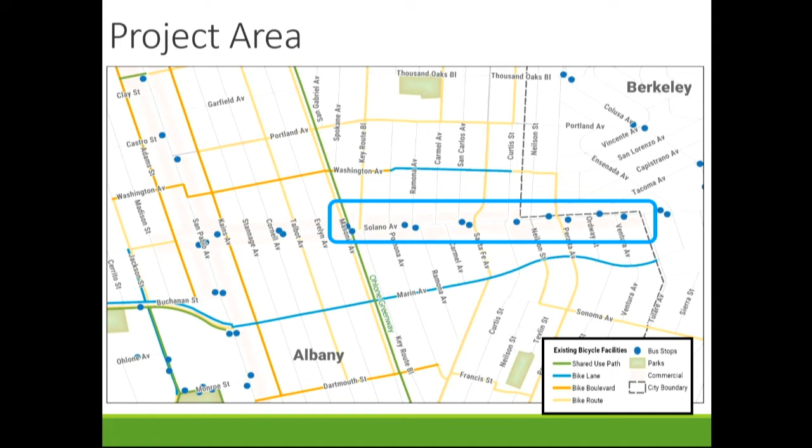So what will our plan include? Our plan's really looking to develop vision and goals for Upper Solano Avenue. We're also going to look at what it is like today. What's it like to walk, bike, drive, take transit along the corridor today?

And then we're going to take all of the comments that we've received throughout the community outreach process, through the meetings that we've had with our community advisory group, which is comprised of business owners, representatives from the Solano Merchants Association, from the Albany Rollers and Strollers, as well as nearby community residents. And so we've been meeting with them as well as the Traffic and Safety Commission.

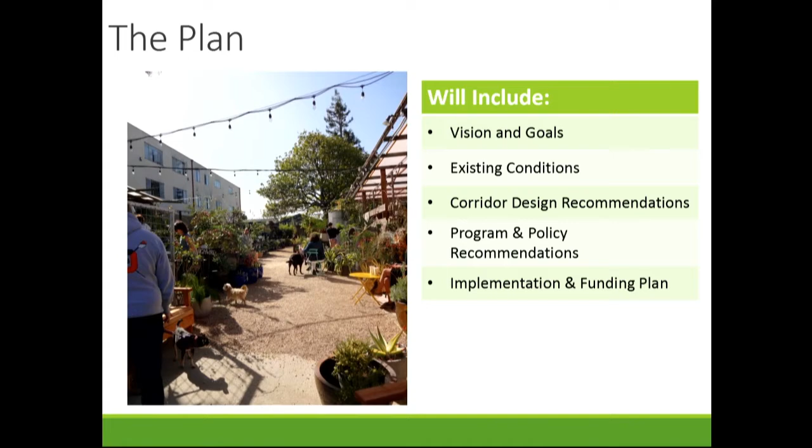So we're going to pull together all of this great thinking that the community's done, that the city's done, into the draft design that we're going to actually show you tonight. The plan will also include some policy and program recommendations as well as how to get it done, so an implementation and funding plan.

So next slide. We want to ensure that the plan that we're developing really aligns with the community's goals. Throughout the outreach process, we've heard these 4 main interests really rise to the top. People are very interested in improving safety for all people who use Solano Avenue, in enhancing the access to transit, as well as providing a cohesive streetscape.

People say they really enjoy being on Solano. They love to shop, they love to eat, they love to run their errands, but it could be more inviting, it could be more enhanced. You could have more of a sense of, I'm really on Solano Avenue. So really looking to support and bring up the things that people really love about Solano, and also Lower Solano, as we talked about. And then supporting the local economic activity that's there today.

So in order to get community feedback, we held a walk audit and design workshop in late May. We had about 40 folks attend, and it was just a great couple of days. We had a charrette, and it kicked off with the community outreach portion. And then we can go to the next slide. And then we had an intensive design workshop with our urban designers from our team at Toole Design, as well as the team from Opticos, and we began to sketch out ideas. Actually, right in this room, we had a table set up right over there.

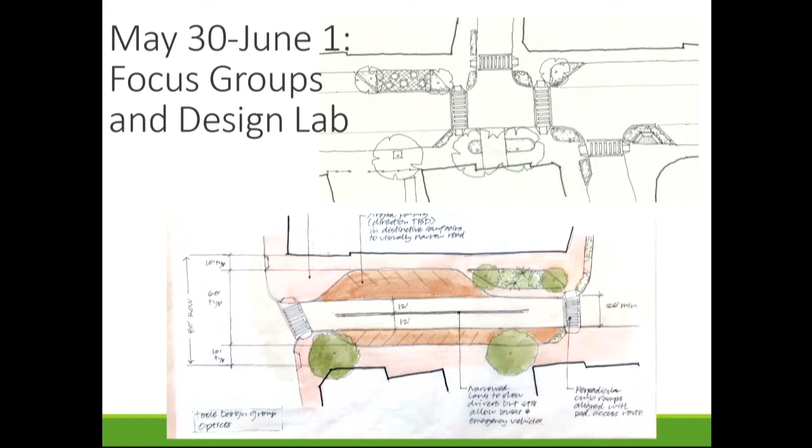So during this, we also had focus group meetings. We met with folks from the Center for the Blind, and we also met with a bunch of business owners to get a sense of day-to-day, what is it like having a business? What's parking like? What's loading and unloading and goods movement like for you? We also met with city staff, including police and fire, to really get feedback on the initial ideas that we were developing.

So then, next slide, please. What we did is we took all these ideas and we developed the corridor design that you see down here in the picture on your left. After we developed this, it went through a city review process, but then we also wanted the community's input on this as well.

So in late September, we held a design preview and pop-up event. We had the corridor design at Flowerland, which was really fun and just very inviting. And so folks were able to really look at the corridor design and ask us a lot of really great questions.

And then we also simulated what it would feel like if the design was implemented at the corner of Pomona and Solano Avenue. So I'm not sure if you were able to come by, but I hope you were. We had a temporary demonstration at that corner. So folks were able to, as you can see in the image, we used these straw wattles to simulate bulbouts, to simulate the refuge islands.

So people were able to experience what's it like to cross the street, what's it like to drive through this area. So we had, of course, people driving their personal vehicles, but we also had a tanker truck come by and a FedEx truck come by. So we were really able to see what is it like for really bigger trucks to use this area and what's it like for personal vehicles to use this area.

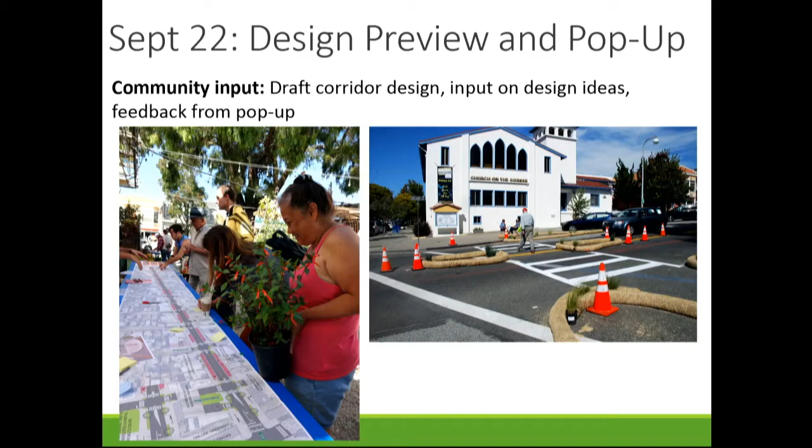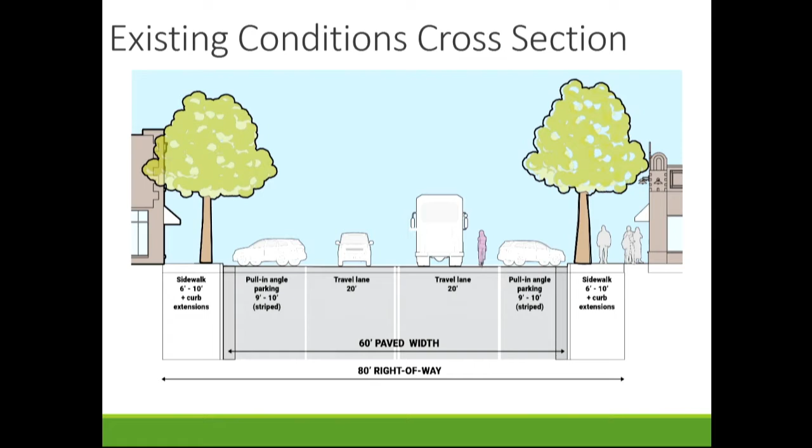So next slide, please. So to give you a sense of what it's like today, this is a cross section. So this is sort of if you took the street and sliced it in half, what it would look like. So currently the travel lanes for the vehicles are about 20 feet wide. We have pull-in angled parking that's about 10 feet wide, and the sidewalk really varies in width from 6 feet to 10 feet. So next slide, please.

So what this shows is the proposed intersection cross-section. So at the intersection, we really propose narrowing the travel lanes to 11 feet. We also recommend extending the curb, and the width sort of varies at the different intersections. And we also recommend extending the sidewalks in some places. So I want to dive in a little bit about why we're recommending this here.

Intersections are really the most stressful point for pedestrians and bicyclists because it's where most conflict happens with cars. I'm sure you've experienced this yourself as you walk around. By narrowing the travel lane to 11 feet, this still is wide enough to allow fire trucks to go through, to allow delivery trucks to go through. But it narrows the travel lane such that pedestrians have a much narrower width to cross.

And so especially by adding the pedestrian median in the middle, it really helps folks get from one side of the street to the other in a very safe way, especially because Solano only has signals at 2 intersections, and I believe there's no stop signs other than those 2 signalized intersections. This really helps also to slow down traffic by narrowing the travel lanes, and that was a key goal that we heard from the community throughout the outreach process.

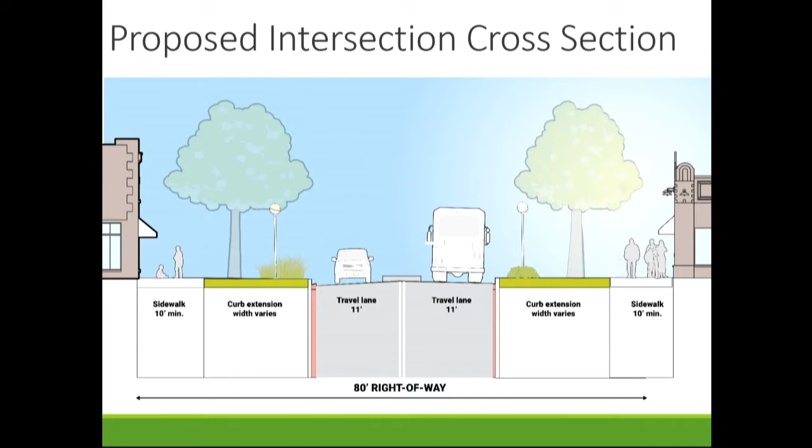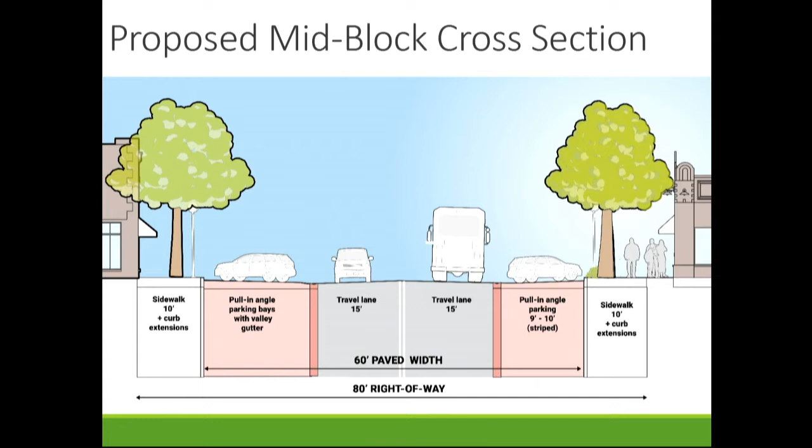So next slide. So this shows what it would look like at the mid-block. So you've now passed through the intersection and you're between the 2 intersections. It does widen out to 15 feet here. That allows for cars and space for bicyclists as well. But you don't really need as much of a pinch point in the mid-block as you do at the intersections because folks aren't often crossing the street there unless they're running across to reach Flowerland, which we've heard anecdotally a lot of people are interested in doing.

Okay, so the draft design was included in your packet, and I think tonight for the presentation, unless you have specific questions, which I'm happy to answer after the presentation, I wanted to give you an overview of what are some of the common recommendations that we have throughout the corridor. And I think I might have you go to the next slide. So what we really wanted to focus on is serving pedestrians.

So this is an example of some of the improvements that we made by, like I said, narrowing the travel lanes, adding in medians to the middle of the crosswalks, by restriping the crosswalks and making them high visibility crosswalks. Also realigning the curb ramps. So I don't know if you've experienced this, but on many of the curb ramps on Solano Avenue, users are often pushed to the intersection rather than to the crosswalk. And so we really want to realign that so folks in wheelchairs and folks pushing strollers are much more comfortable. I think we can go to the next one.

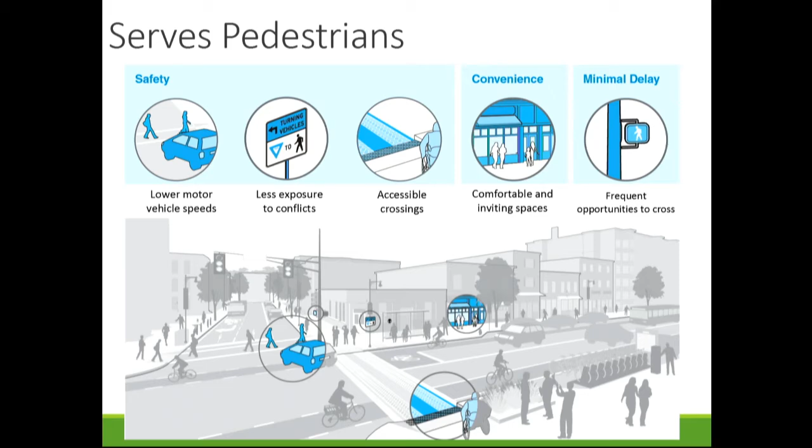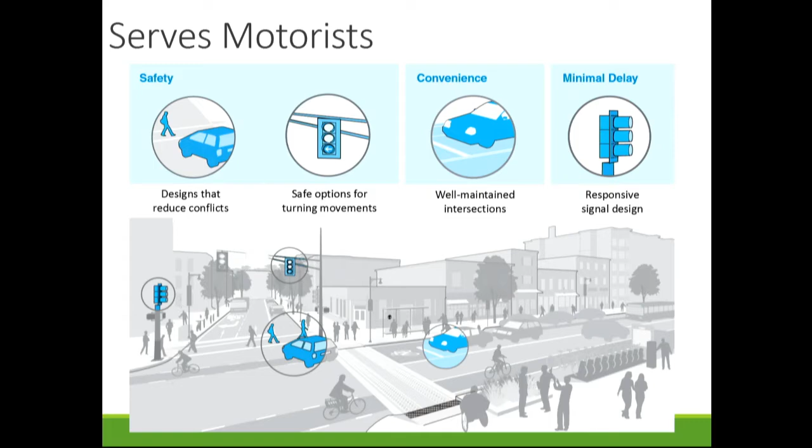We also recognize that people drive on Solano Avenue, and we really want to be mindful of reducing conflicts for motorists as well. And so by providing more space for pedestrians, by providing ways to slow down the vehicles, this will hopefully reduce conflicts and reduce confusion amongst users.

So this is just a general overview of many of the recommendations that I've been speaking to you about. We're also recommending to widen and repair cracked sidewalks. There's many areas of the sidewalk throughout the corridor where maybe larger trees have uprooted the sidewalk. So we're looking at repairing the sidewalks in those areas, installing the curb extensions, as well as considering repaving the parking area or adding a textured pavement so that it visually narrows the corridor as folks are driving along.

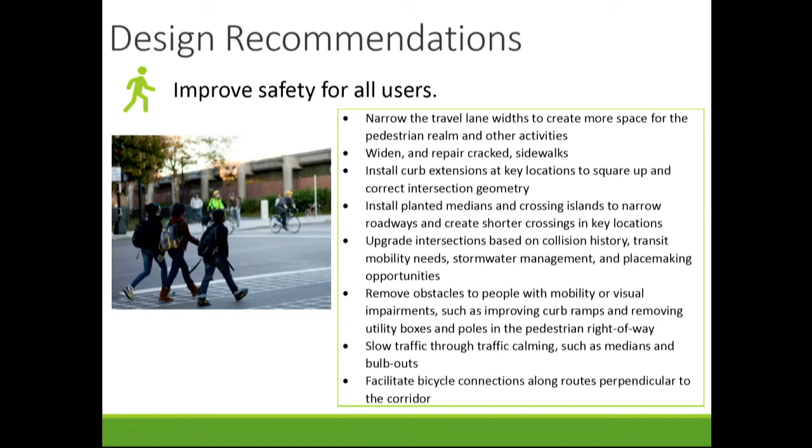Next one, please. We also want to be mindful of transit riders. So this is an AC Transit route, and this design really seeks to make transit stops more accessible and more comfortable. So in many of the areas where we're recommending curb extensions, we're also partnering this with transit stops that can also be really activated as public spaces. So think about the parklet outside of Hal's Coffee on Lower Solano. So ways to make it a public living room, but then also serving transit riders as well.

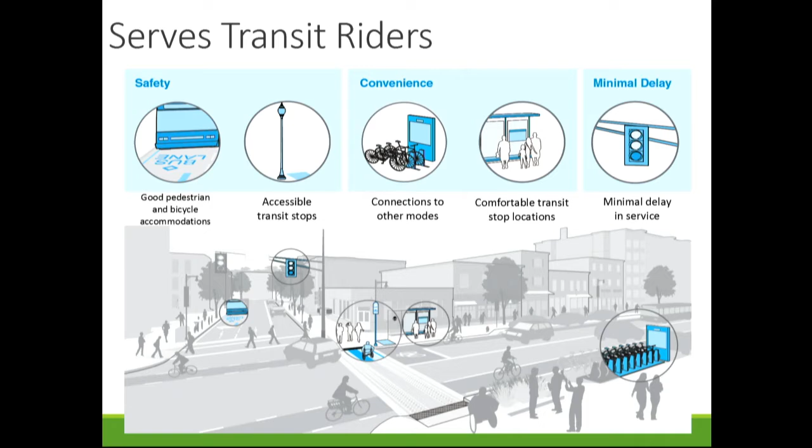We've been speaking with AC Transit, and they have done an analysis of the corridor and found that there are two stops, one at Tacoma and one at Ventura, that they consider ghost stops. And so that means that folks aren't really catching the bus there very often. They're not really getting off the bus there as often as the other stops. And so this really slows down service. And so AC Transit is interested in the possibility of removing those stops to increase the efficiency of the transit service. So this sort of does a double benefit in that it improves transit ridership, but it also has a net positive effect on parking.

So we detailed this in the memo that we provided you this evening, but with the corridor design, there's actually a net increase of 9 parking spaces. And this is largely due to these closures of the 2 transit stops. So we're going to see an increase in 6 sort of regular parking spaces, and then an increase of 3 ADA accessible parking spaces.

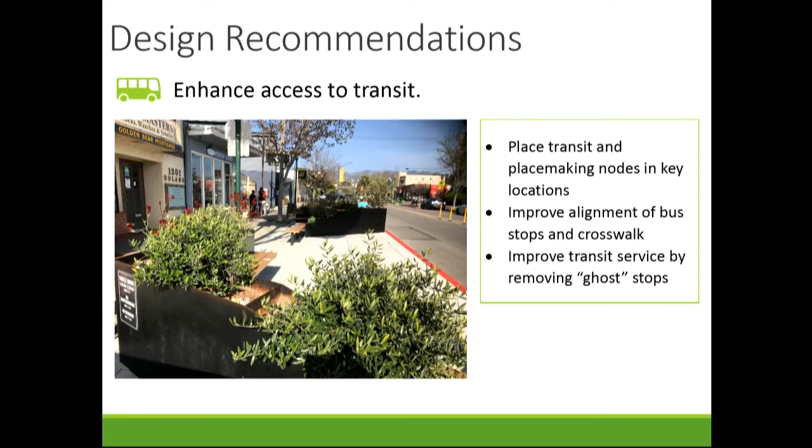Also want to add that currently the parking stalls are not all at a consistent angle. And so as a part of the design, we've restriped the parking to be at a 45-degree angle. And this allows us to pick up a couple of extra spaces that can be used for bike parking or motorcycle parking. So there's actually also a net benefit of 18 spaces that could be used for motorcycle parking, or it could also be used for on-street bike parking, such as a bike corral, that kind of thing. So we are seeing a positive increase in the number of parking spaces. Okay.

We're also looking to enhance the streetscape. I spoke a little bit about this, but looking at the lighting and the landscaping throughout the corridor, at the intersections where we're increasing the curb extensions, the bulb outs, thinking about how can we best program these. So in some areas it might be, this is really a great location for sidewalk dining, if maybe it's outside a restaurant, or maybe this is a transit stop, or maybe we want to add some nice landscaping that can also serve as stormwater management. So being very thoughtful about how to activate different spaces along the corridor.

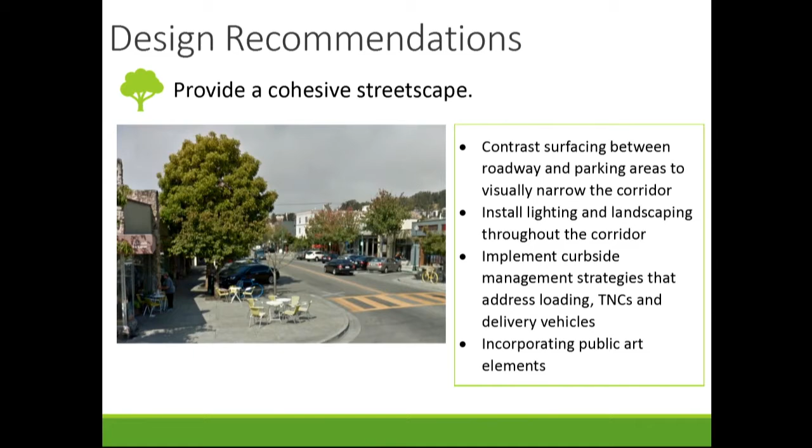We're also looking at incorporating public art elements, so considering blank walls for possible murals or green walls. Also looking at places where there could be a gateway to Upper Solano and possibly Mid Solano, and also considering curbside management strategies, so thinking about loading and unloading. We heard that a lot of people actually will park just briefly to pick up dinner, that kind of thing. So how can we have parking spaces that really serve people who are maybe using the corridor only for a limited amount of time to pick up dinner, that kind of thing.

And we also really want to look to support local businesses. So looking at the existing business ecosystem and building upon that with retail strategies, as well as creating public spaces to encourage people to linger and really spend time on Solano Avenue, say, well, how about we meet at the intersection of Solano and Santa Fe and just spend all afternoon there? So really creating gathering places throughout the corridor.

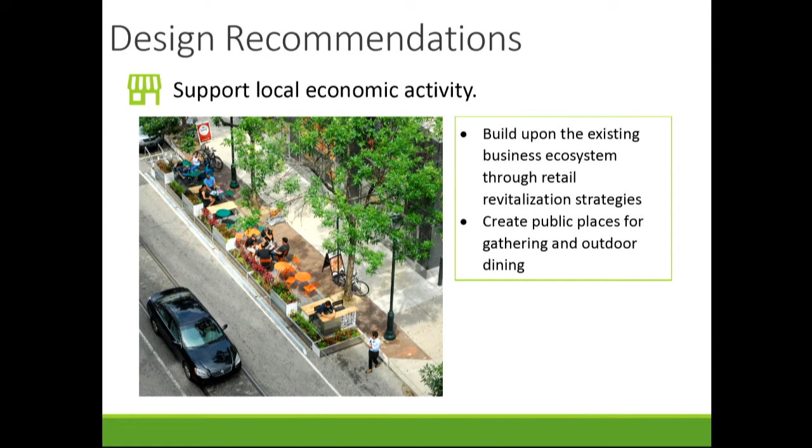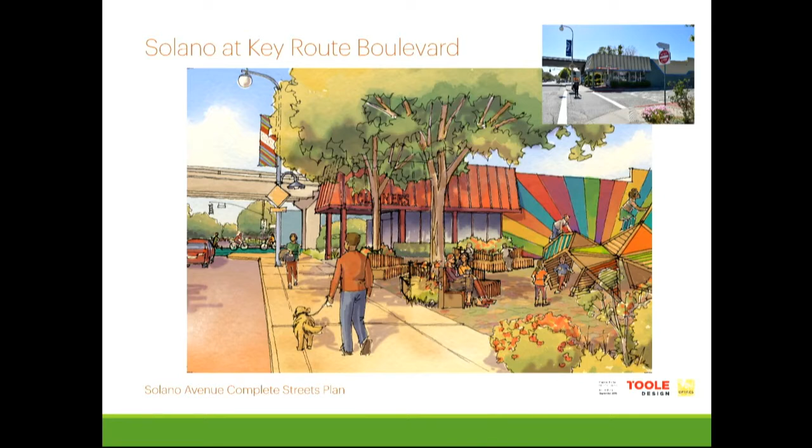So this is looking west at Key Route Boulevard. You can see the picture in the top right-hand corner of the cleaners, which you may be familiar with. This is looking at the possible alternative if southbound Key Route Boulevard was closed, and the design actually has an alternative to reroute it. But this could become a public open space, and it shows activity. This wouldn't touch the Veterans Memorial that's there now. It would keep that memorial but enhance it and build upon it as a public space. Interest in having more play areas and more public gathering space was heard throughout many of the outreach events.

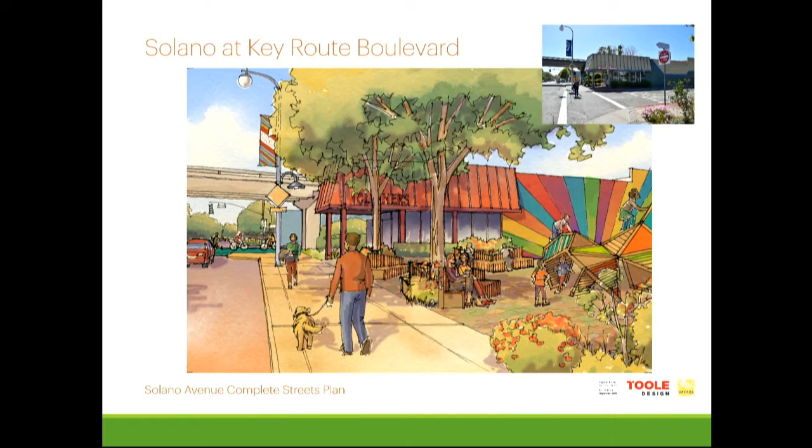Okay. And then this is our last perspective. This is Solano at Tacoma Avenue. This stretch of Tacoma Avenue is actually in the city of Berkeley. So Anne and her colleagues have been very diligent about ensuring that their colleagues in Berkeley have been involved in these conversations. They actually sit on the community advisory group that I mentioned earlier. So they have vetted these designs and said that they really appreciate the designs put forward for Tacoma Avenue.

What's proposed here: currently the crosswalk there is very long, and it's stressful for folks crossing the street. So this would be squaring up the intersection so that it shortens the crossing distance, and it also creates additional public space. This would be, if you're heading south down Tacoma Avenue, what it may feel like heading in that direction.

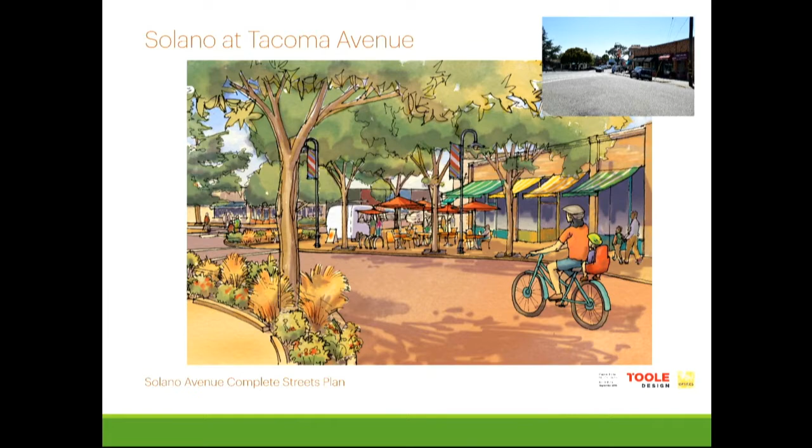So as a reminder, we will be back to you in December to January with the draft plan. This will incorporate all of the designs that I've presented tonight, as well as a write-up of our process and programmatic and policy recommendations moving forward.

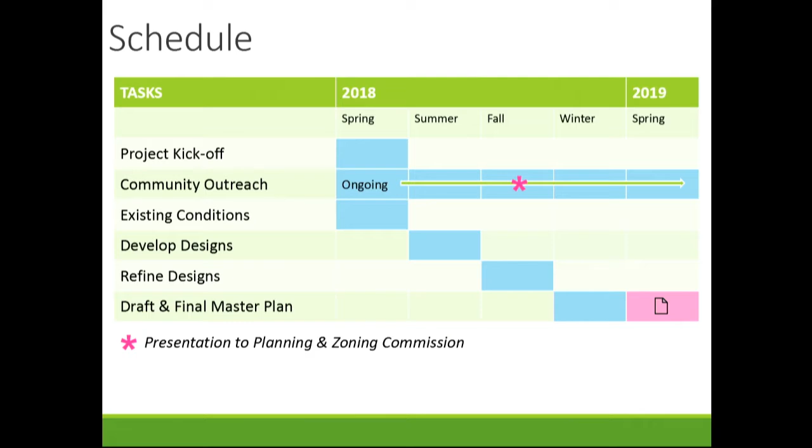Great, thank you. Commissioners, are there any questions you would like to ask at this time? I probably have a few questions. Thanks for the presentation. Sure. Thanks for what you've done on it. It looks great. It really is an exciting project, I think.

I may have a few questions, but the first one that comes to mind is maybe you can talk a little bit about the process and what happens once your report is done, because I'm interested in implementation already. So is there money for Complete Streets projects, and are you doing cost estimates? And will we be applying for grants? We're going to be looking for grants. At this point in time, it's really just the high-level plan. Once it is adopted by the city council, we would start applying for grants to do some initial design work. So we need a plan adopted by the council, okay.

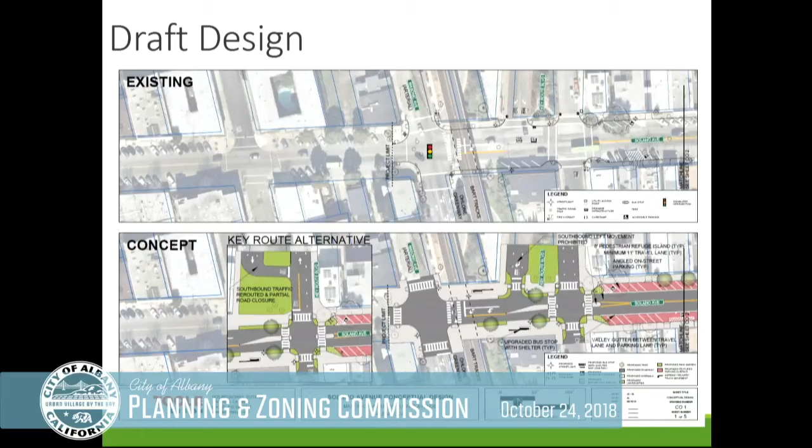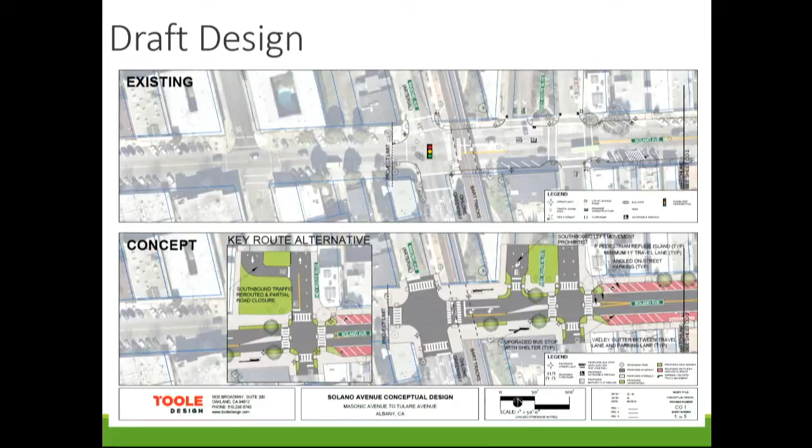The reason that they like that is that in the other design, and I would like to point. It's right next to it. The other design is right there. This doesn't allow a left turn. It doesn't allow the left-hand turn, and a lot of folks have given us feedback that they make that turn a lot if they're heading to schools and running errands.

And so people say, I understand why you want to do this. Having two intersections so close together just makes it really difficult for drivers and for pedestrians. I'm sure you experience this all the time. So we really wanted to simplify it, and people are really gravitating towards the Key Route alternative. It was pretty clear in both the outreach with the community advisory group and the September pop-up event.

People really liked the alternative because it still allowed them to turn left, but it also provided clarity. They also built upon this idea and asked whether it would be possible to extend the sidewalk north through the median, and had great suggestions for play areas in the green space. We still need to do some internal vetting to ensure city staff agree, but we're leaning towards the alternative at this point.

Well, I have a couple of comments on that. I probably favor that option too, myself. But I'm thinking about parking for the dry cleaners that's there. There's one green space in front. Most everybody parks on Key Route and walks in. It looks to me like they'd get 3 green spaces maybe, or some curb spaces on Solano. Maybe they'd gain 2. But anyway, I'm worried about access to that business. That's right, and that's a concern of ours as well.

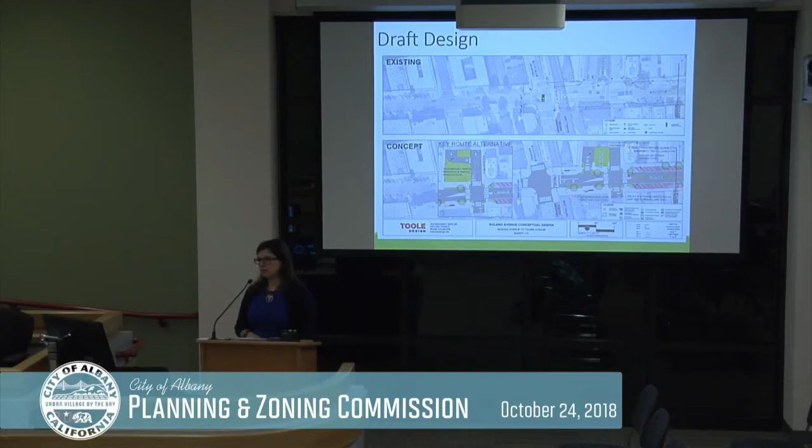Have you been in contact with Safeway? I have, yeah - with their Real Estate Division. I raise that because they run big semi-trucks up there, and they navigate the lower part of Solano right now without much trouble, I guess. But I think they should know about this. They back into their loading docks, which are poorly configured and difficult to get into. I think they use the driveway that you're going to keep open for most of their work, but sometimes they're also on Neilson there, and I don't know if they back in that way or not. So that was a thought I had, the effect on Safeway.

It looks to me like on your plan you're showing that as leave the parking lot only - would that be both an in and out access into the Safeway parking lot on that westernmost driveway? Yes. It's how it's currently configured, and that would continue moving forward.

We've also run the AutoTurn program on many of the intersections, especially around Safeway, with the recognition that larger trucks do enter Safeway. So what we're proposing there are called truck aprons, which would continue to narrow the travel lane for personal vehicles. Truck aprons are in our engineering toolbox - they're very comfortable for 18-wheelers, delivery trucks, FedEx trucks, that kind of thing to mount, but for personal vehicles it's a bit rougher. So it really encourages people to drive slower around there, but it doesn't impede emergency vehicles and delivery trucks. We've run the analysis in those areas, and the larger trucks can still make the turns even with the truck aprons that are proposed there.

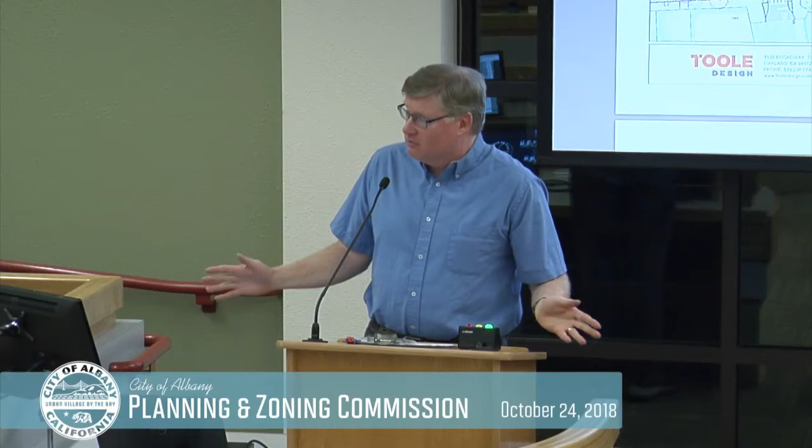As a stroller and roller, I want to say that slowing the traffic is fabulous for bikes, for cyclists who want to get on Solano. It can be pretty scary with the large trucks. We understand why they're there, and slower traffic would help.

I want to point out, though, that while intersections are hazardous, often one of the scariest things on Solano is motorists pulling quickly into parking spaces. When cyclists don't feel comfortable in the lane, they're often sharing the lane. Very often, motorists will spot a parking space and pull very quickly into it without signaling. I've been in a car where this happened, I was not driving thankfully. I could see it happening to me both as a motorist and a cyclist.

As a result of this concern, the Traffic Safety Commissioners requested that staff consider back-in angle parking. I don't want to go into that in the short time I have, but I could certainly explain it if requested. Staff is responding at our next meeting, hopefully with a demonstration, so we could take a look at what that might look like and share with the community as an option.

I think it covered just about everything I was concerned about. There definitely needs to be something done about the different types of people who need to bring their cars to Solano, whether they're getting a ride share, picking up dinner, or dropping grandma off at the restaurant and then finding a more long-term parking space. Especially after enforcement ends, it gets really scary out there in the dark in the winter, with a lot of people double parking and all.

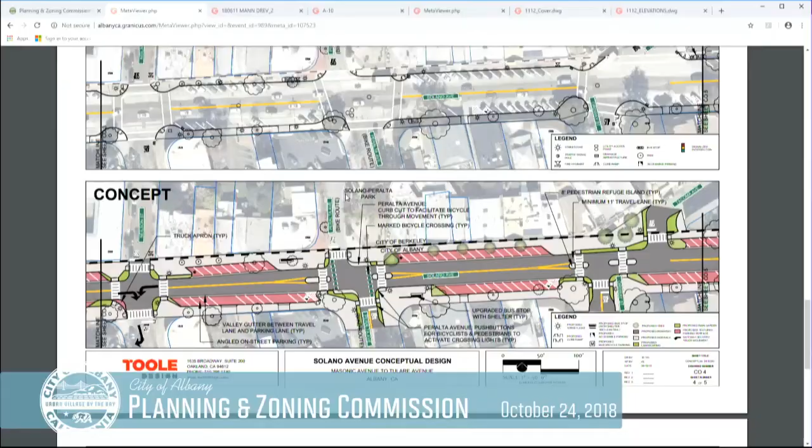We have proposed a location for a rapid flashing beacon at Peralta, which is identified as a bike route in the city's plans. You can also see there are proposed conflict markings to help facilitate bike traffic north and south. We're proposing the installation of push buttons — two separate push buttons, some accessible by pedestrians, and some accessible by bicyclists so they wouldn't have to dismount from their bikes in order to push the button.

The thought is that those are some specific bike route treatments. We've also gotten feedback throughout the community engagement process that Curtis is identified in the Berkeley bike plan as a bike route, so there's been encouragement for us to look at providing better north-south connections across Solano on Curtis as well, to align up with your neighboring sister city. By teeing up many of the intersections and providing ways to slow down traffic, we're hoping that all of those will have spillover effects to better serve bicyclists. This has been a really big topic of conversation for the city and the project team throughout, and these are some of the considerations we've been giving to bicycling users.

Yeah, okay, thank you. Yeah, you're welcome. Are there any other comments before we wrap this up? One more comment I wanted to make.

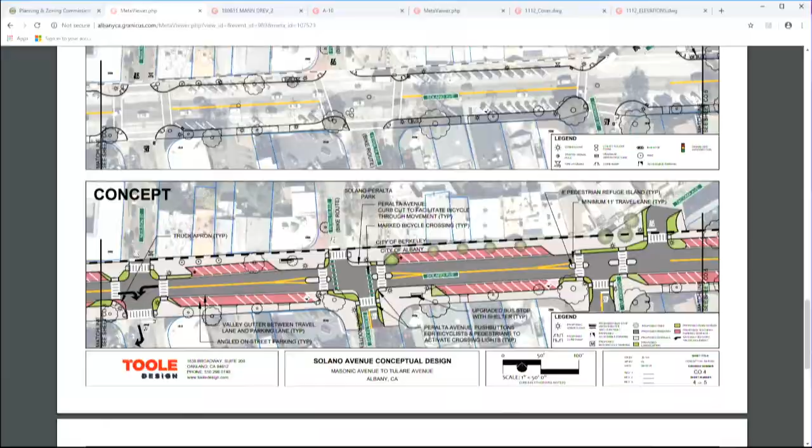The public art component is intriguing here and not to be overlooked. I'm excited about some of the drawings you proposed. I would urge extra care and extra communication down there by the Veterans Memorial at Key Route.

I stood there today trying to envision how a modern kind of recreational facility could be integrated into that space that would be freed up next to the Veterans Memorial, which is kind of historic and Art Deco sort of style, and not something that at least a lot of us old timers in Albany would want to see modified.

How to integrate that, I see that as a real challenge, because I don't know quite how to do it. That being said, I'm quite intrigued with the idea of freeing up that street space there and having some extra open space at that location. So I'll make that comment.

Your focus on Santa Fe as being a real pedestrian gathering place is lacking sort of a restaurant or an ice cream shop, or that seems to be the magnet. Ice creams or coffee seem to be the magnet for people. But with the bank there and the other uses that are there right now, the small retail, I think you have to work with some businesses to really make that happen.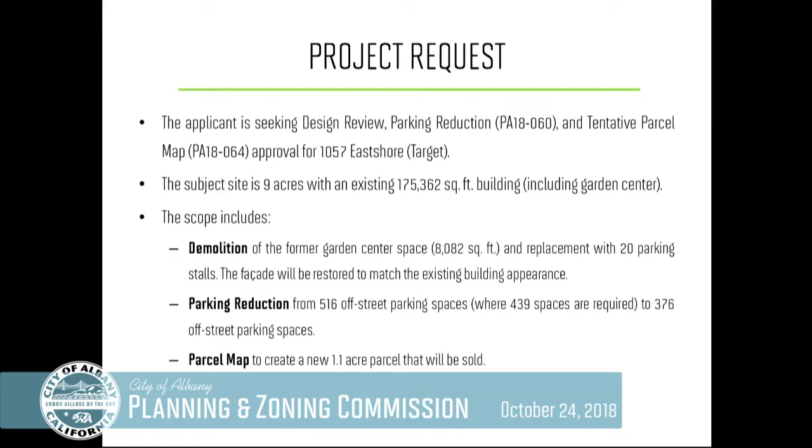So we're back before you tonight with the complete package of the two applications, one for parking reduction and design review and the other for the tentative parcel map at Target. In effect, there's the three requests. So overall, the site is 9 acres with an existing 175,000 square foot building, which includes the garden center. As part of this scope, the garden center is proposed to be demolished. That's a little over 8,000 square feet. That would be replaced with 20 parking stalls, and that portion of the facade would be restored to match the existing building appearance.

The overall parking would be reduced from 516 off-street spaces, where 439 are required, to 376 off-street parking spaces. And actually, when this was originally built, Target way overparked the site by design. So they more than complied with the requirements that were in place at that time and currently. And then the last entitlement is a parcel map that would create a 1.1 acre parcel that would be sold at a future date.

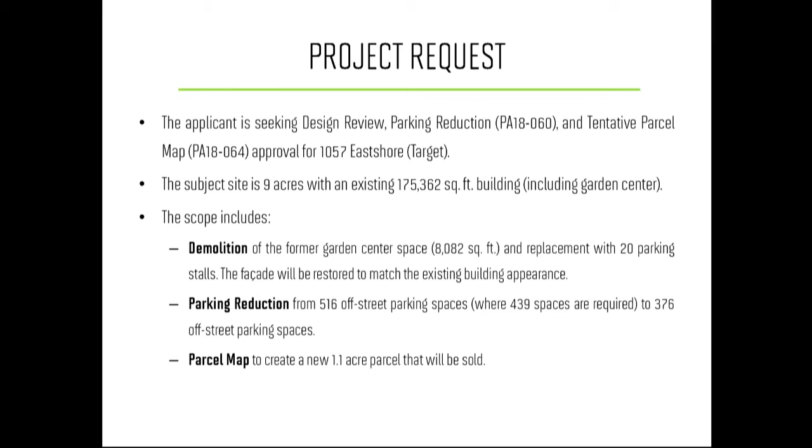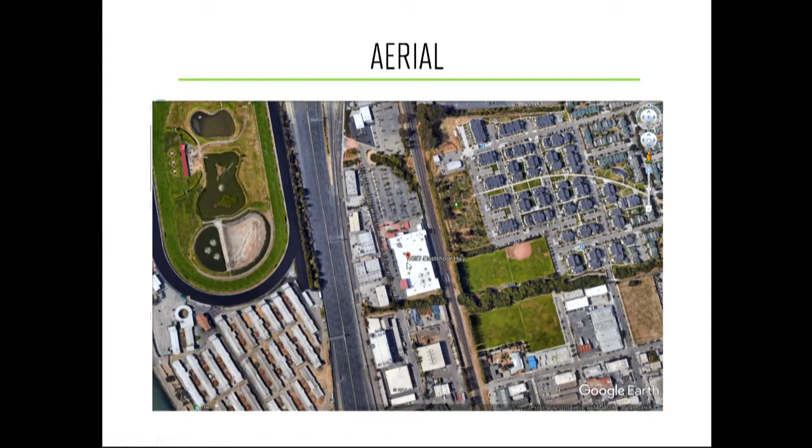I'm sure everybody is familiar with Target, but just to give you a little context, it is here on Eastshore. This is Interstate 80, and you have Golden Gate Fields across the freeway, so it is down here on Eastshore. This is the street view of the facility as it exists today, and this is the garden center that is located immediately in front of the building that's proposed to be demolished.

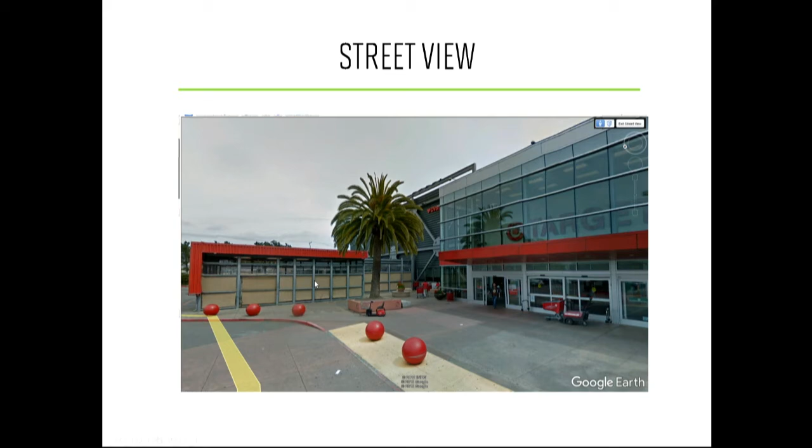Just to give you some background, there was a series of entitlements that went with the original construction approvals in 2003. This included an EIR, a conditional use permit to authorize retail use, design review for the actual construction, a tentative parcel map, which at that time consolidated non-conforming lots to create legal lots for the future construction, and a variance to exceed the 45-foot height limit for the zoning district. The building was completed in 2004. That garden center was functional up until 2011. It was briefly leased to a third party, and then the space has been vacant in the past 4 years.

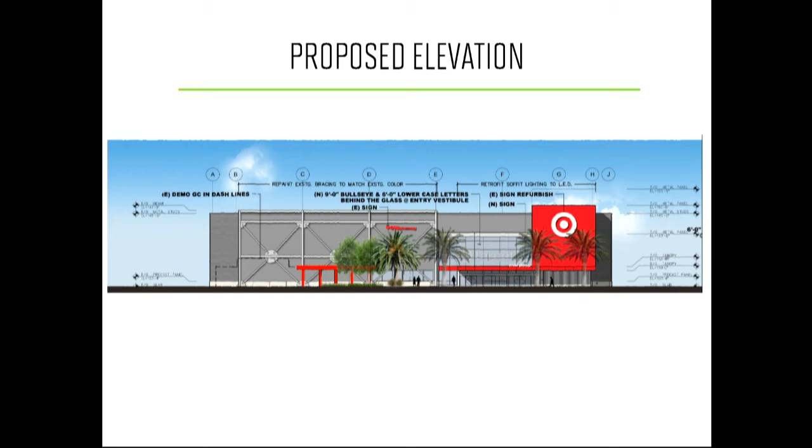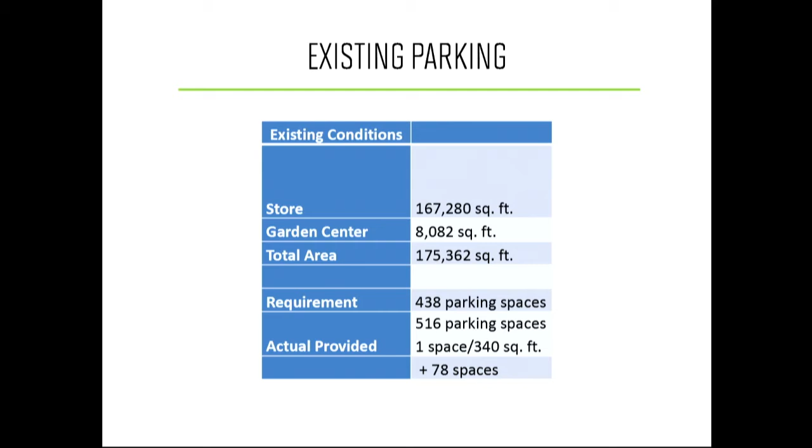And just to give you a snapshot on the parking, as I mentioned, the site is currently parked in excess of the requirements, so there's actually 78 additional off-street parking spaces that are provided. Under the current proposal, Target's effectively asking for a ratio of one space per 444 square feet. So it's a reduction altogether of 42 spaces, as they would be providing 376 on site.

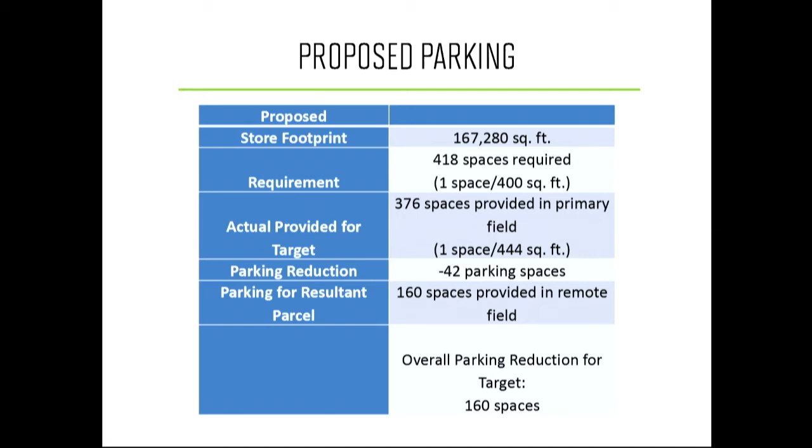There are 160 spaces that are provided in that remote field lot that would subsequently be sold off for a future user. However, Target has indicated that they do require cross-access reciprocal agreements, and I believe they have that with Toyota of Berkeley. They would certainly have that same requirement for a future user of that property.

You received one item of correspondence in regards to the latest staff report regarding recent creek cleanup efforts. That was sent by Friends of Five Creeks and forwarded to you. And just to give you some additional context, there was a pretty major effort on October 1st and 2nd, earlier this month. There was an incredible amount of debris that was removed. I think in the initial cleanup effort, there was 5 tons of debris. This effort continues to be ongoing and is primarily led by the City of Berkeley, but Target is also working with them collaboratively to ensure that the site continues to be clean.

You also had received correspondence as part of the initial packet that went out in September. There were 2 emails and 1 letter that were received and forwarded. They were also included in your packet this time around. There was a letter from AC Transit, a joint letter that was signed by 7 Albany residents, and then the Friends of Five Creeks letter that you received.

Just to refresh your memory, AC Transit originally had asked for a condition of approval that would have required Target to conduct a feasibility analysis to potentially extend AC Transit service, as well as accommodate bus staging, on-site circulation, roadway circulation, and passenger accessibility. As was noted to the Commission last time, we had concerns about this, and so we ran them through our legal counsel, who concurred that this doesn't really meet the rough proportionality test.

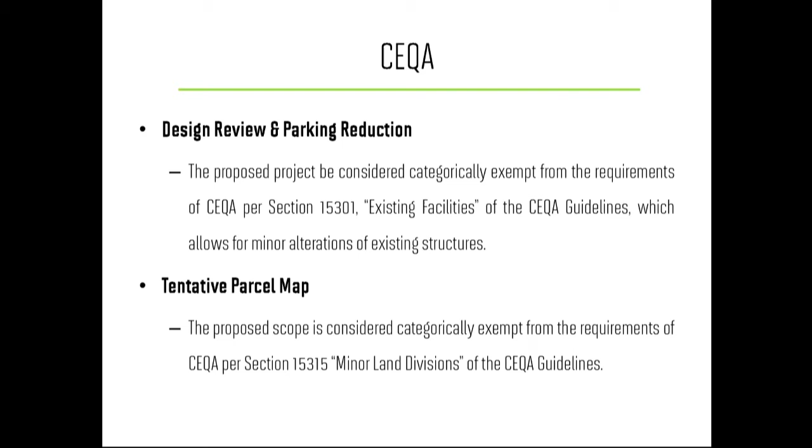There are 2 CEQA provisions that apply to the entitlements for the design review and parking reduction. It's an existing facility, so it's categorically exempt pursuant to Section 15301, existing facilities. And the tentative parcel map is exempt pursuant to Section 15315, minor land divisions. And with that, we recommend approval of the project.

One thing to note, I sent the Commission an email yesterday. There was some language in the findings that incorrectly referenced residential. That was omitted. The revised staff report with the appropriate zoning-specific findings is included in the revised report that you received yesterday and is also posted on the city's website.

I have a question about that, so maybe we can just take that for a second. And apologies, because I didn't compare what was originally there versus what's there now. But I printed out the staff report today from the city's website, and there is still a finding about the availability of new housing. So I just wanted to make sure I was looking at the right set of findings. Specifically, this is on page 18 of the agenda packet, and it's finding number 6. Yes, that's another thing that we will need to correct as part of the record.

Should be corrected, okay. And then I also wanted to note, while we're on the topic, that on finding number 7, the explanation just wasn't totally clear to me. I think that there probably aren't reciprocal access easements recorded because it's currently just a single parcel. Right, it's a forthcoming action, and I can modify that to acknowledge that the reciprocal access agreements will be in place with the future sale of the parcel.

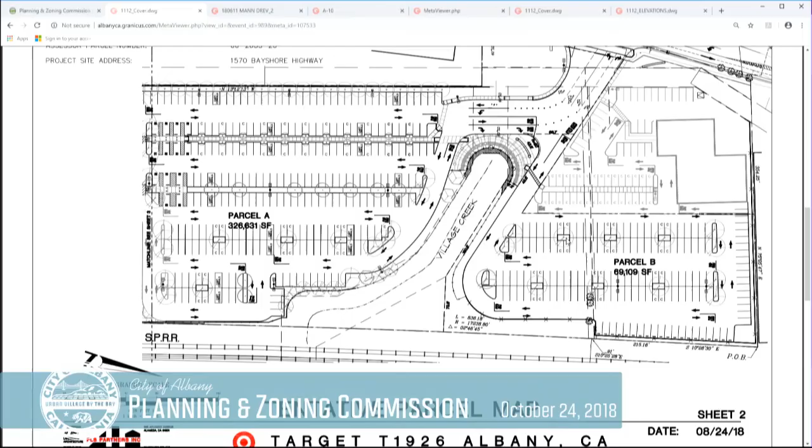Yeah, we can. It could be that I'm not clear on my computer, or it could be an issue with the cross easements. And I'd be interested in knowing where those different easements are. Yeah, right there, that figure there. So where is the boundary for parcel B? What are we splitting off exactly? So parcel B is this entire parcel, and I think we had the same reaction because when I looked at it, I was confused by this line that was drawn here, thinking that that was a property line. This, in fact, is a pretty major sewer easement that runs through the property.

Okay, yeah. So parcel A is effectively all of this side of the property. Parcel B is this portion, and then this is the boundary that would be shared with Toyota of Berkeley. Yeah, so this is the Toyota of Berkeley building right here. This is the driveway aisle. Okay. And so parcel B is this. But how about the roadway there? Does the roadway go down to that dotted line there at the end of the Village Creek easement? Is that where the roadway is?

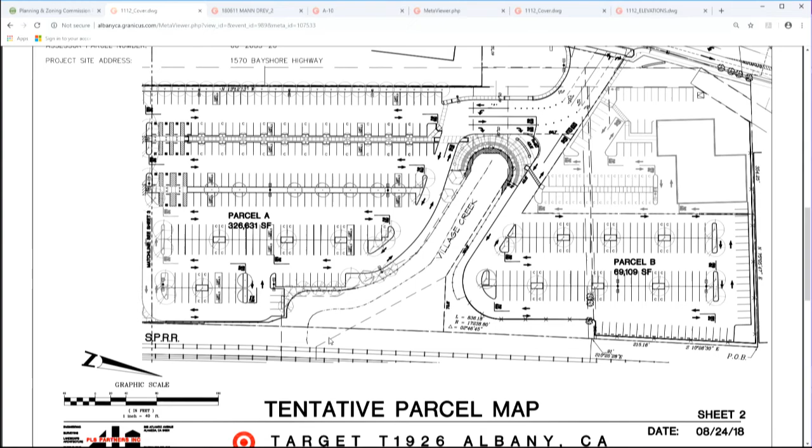Farther to the west from where your cursor is? Keep going down. There's the Village Creek thing, yeah. Go down closer toward Cleveland Avenue. Would the applicant like to address this question? Does he know where it is? Yeah, we really need to know this. The line comes up here, across here, and sort of jogs, continues up around the corner, across the intersection. And so that's the line I was thinking of. So that's the parcel boundary there, that dotted line through the intersection? Correct. The drive aisle is all within the separated parcel. Okay, all right.

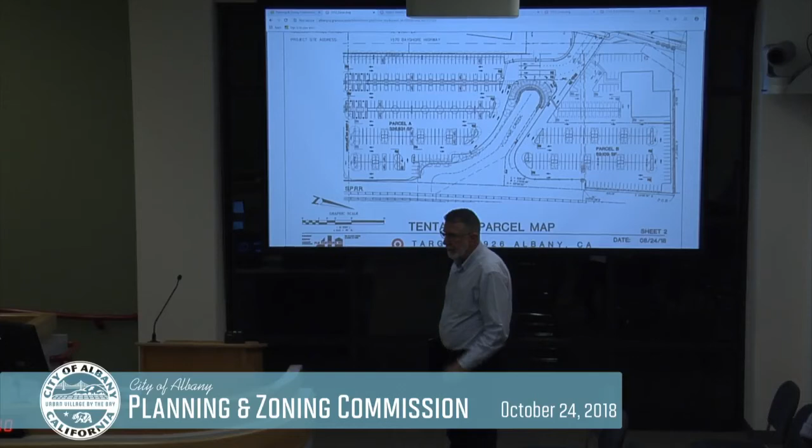Okay, and where are your access easements? Is there one shared with the Toyota? It would be a blanket access easement, so anyone entering the site would have access to any portion of the site. You can park anywhere; you don't have to be parking over here if you're using that, then you could walk over to Target at the same time.

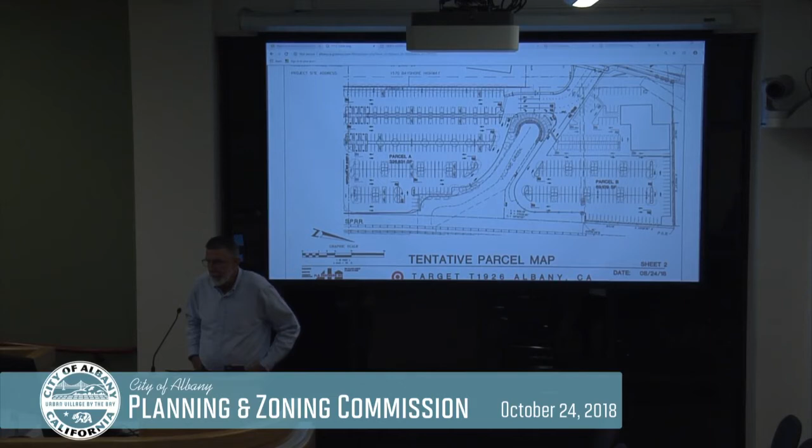Okay, so I'm confused. It seems to me that if you sell this to someone, they're going to want to develop it with something. They'll put buildings on it. That was the intention. And then what? They would have to maintain whatever requirement for parking on their parcel. Uh-huh. Okay. It'd be subject to all the current standards. And would there be any withheld conditions on behalf of Target where Target might be able to use this for overflow parking?

Well, that would be part of the cross-access agreement that Target customers can park there. And do you know how many spaces Target wants to reserve there? I don't think at this time they would want to reserve any specifically. They feel as though they've maintained enough on their site for their demand. If a customer is going to the future use on the smaller parcel, they're welcome to park there and then go to Target or go to Toyota.

Okay. It'd operate like a shopping center. Okay, yeah. So it's kind of the way that they would do it at shopping centers then, okay. All right, that helps. I'm glad to know what the boundary of the parcel is. A lot of lines on the front. It's kind of hard to keep them all clear, I understand. Okay, thank you.

And while you're up here, is there more of a statement you'd like to make about the project? No, actually, Ann did an excellent job of presenting the project, and I really don't have anything more to add. If I can answer any questions, I'd gladly do that.

Well, I wanted to say thank you for providing all the additional information. I think that the additional info that was provided on the map and on the parking demand really addressed all the questions I had. And I'm glad to see that the cleanup effort happened. It's a little bit outside of the specific request, but it's obviously a concern about how the site is being used, so.

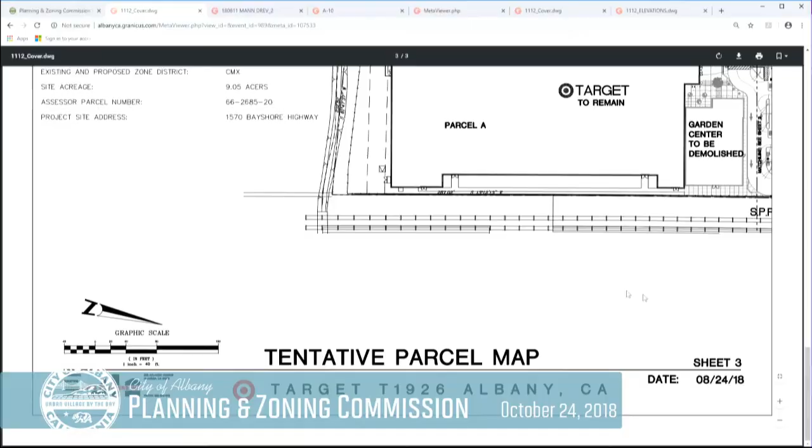Can I have one last question for the applicant? In your plans, I'm just really curious, you're showing three little circles and some rectangles by the bike parking in the new section. I just wanted to get clarity as to what those were indicating. If you go to any of the sheets for the bike parking, any of the enlarged plans. By the garden shop? Yeah.

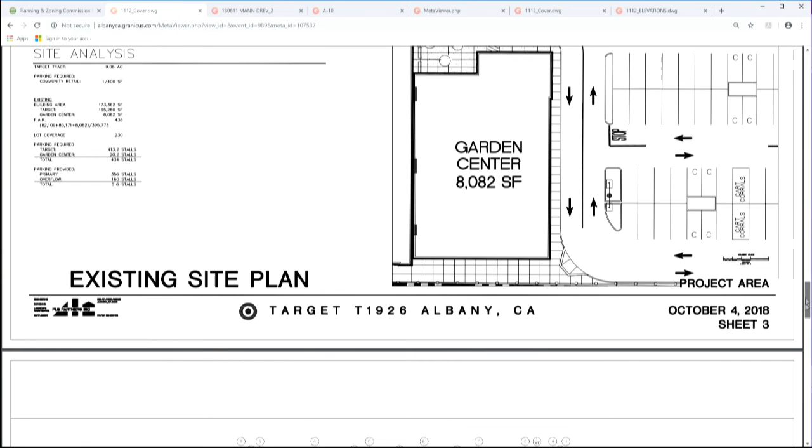Okay, sheet three maybe? Or actually, not where the new proposed plan is. Oh, that's the existing. Yeah, so there's those three circles and rectangles. This is the existing street parking lot?

I mean up by where it says existing bike parking. Right there, yeah, those are circles - three concrete pedestals for sitting on. Oh okay, the big red balls.

And the rectangles are two benches that are out there now. This is a landscape area. These are the two existing bike parking racks, and there's three on the other side of the building. Okay, yeah, that's all street furniture. Good, thank you, good.

Unless there are any other comments, I'll make a motion to approve. Sorry, here you go.

Planning application 18060 and planning application 18064, design review, parking reduction, and tentative parcel map for 1057 East Shore.

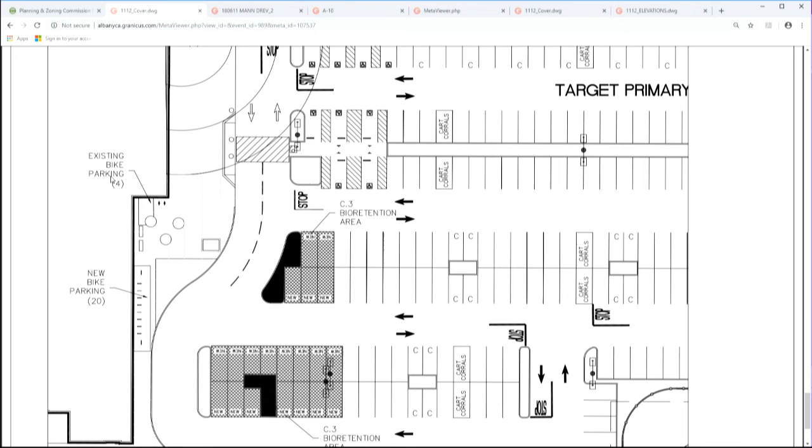As presented. I will second. Okay, all in favor, say aye. Aye. Aye. Okay, approved. All right, so your project has been approved. You don't have story poles up, but there's still a 14-day appeal period. Thank you.

Okay, moving on to item 8.1, study session, zoning ordinance revisions to streamline commercial development review. This will be quick. I'm going to turn it over to Jeannie Iceberg, our contract planner, who prepared the staff report and the presentation that you'll receive this evening.

Thanks, hi, good evening commissioners. We haven't been here in a few months, but we have talked about this topic a few times. So since it's been a little while, I just wanted to give a quick overview of where we were and where we're headed.

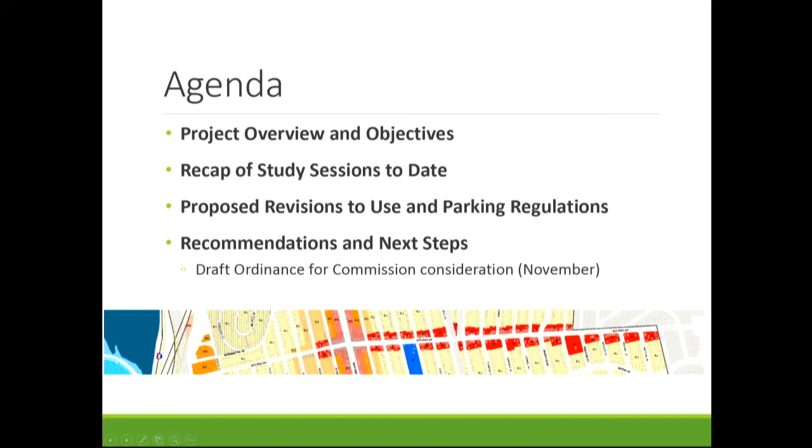So again, we're working on implementation of the Economic Development Strategic Plan, specifically around program 4C about removing constraints to commercial development to try to streamline the plan approval, review and approval process. So specifically looking at allowed uses, design review and permits required, and parking ratios. Our objectives here are about streamlining that process and encouraging well-designed retail. We're looking at the three commercial districts in the city and tailoring the revisions to each of those districts to meet the purposes of those districts, because they are unique.

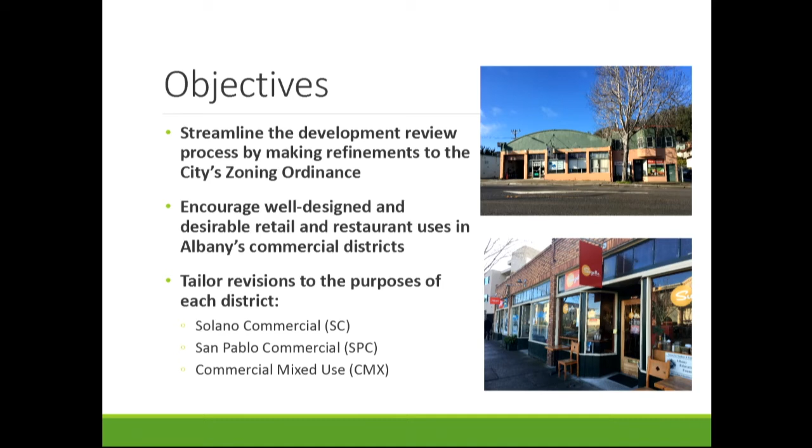So we've met three times now in the spring and summer, mostly talking about use regulations and parking requirements during the course of those meetings. When we met in June, you may recall that commissioners had a few questions that we responded to in the staff report. One was about how the Economic Development Strategic Plan fits into the city's adopted policy context. So there's some discussion in the staff report about the relationship to general plan policies around parking and district uses, and around the climate action plan and the relationship there.

Another item the commission asked for more information on was best practices for setting commercial parking standards, so there's a discussion of what some other communities are doing. We talked to W-Trans, one of the city's on-call transportation and parking consultants, about the idea of blended rates. Right now the city's code has several pages of commercial parking standards for different uses, and in communities with streets and downtowns similar to Solano Avenue, where people don't just park but visit multiple stores at one time, there's a tendency to use blended rates, or different standards by district, versus one standard that may be appropriate for restaurants across the whole city.

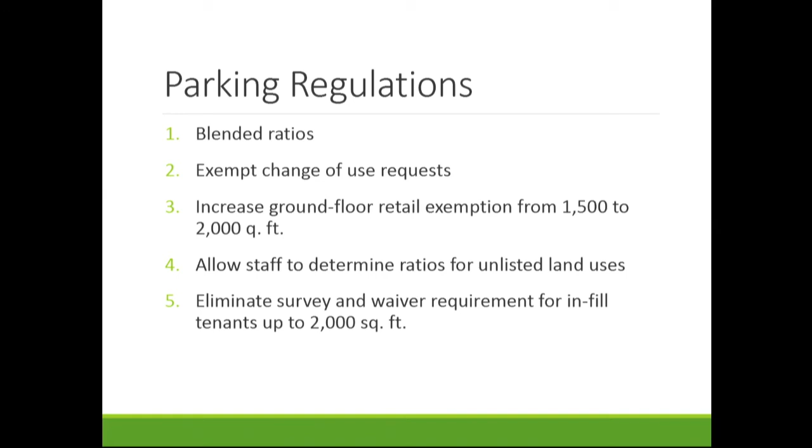If you don't know what kind of businesses are coming in when you're building out these shells, which sometimes happens, then you have a little more flexibility in the code.

Increasing the retail exemptions is probably something that reduces the total number of parking spaces, since we'd be raising that threshold from 1,500 to 2,000 square feet. And eliminating the survey requirement just reduces burden on staff and the commission reviewing those, which tend to be surveys done in areas where parking can't be provided on site anyway. So we go through the action of doing the survey and conclude you don't need to provide the parking, and you can't really, physically, on the site without demolition.

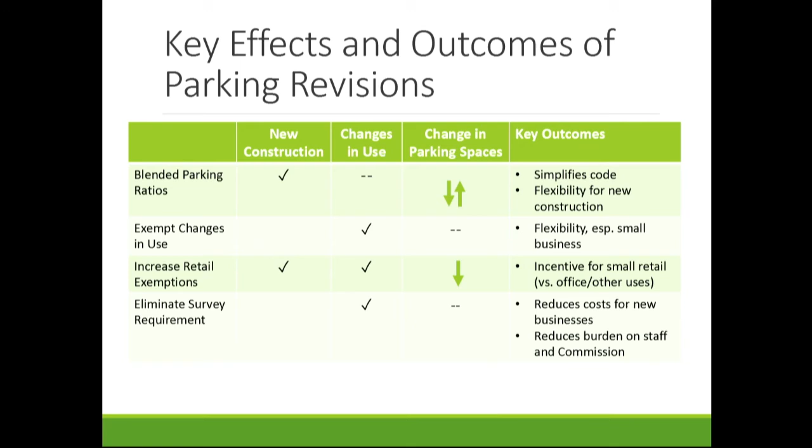So our recommendation is to take any feedback you have on these revisions, and then we would come back with a draft ordinance for your consideration next month, and try to get to the council before the end of the year.